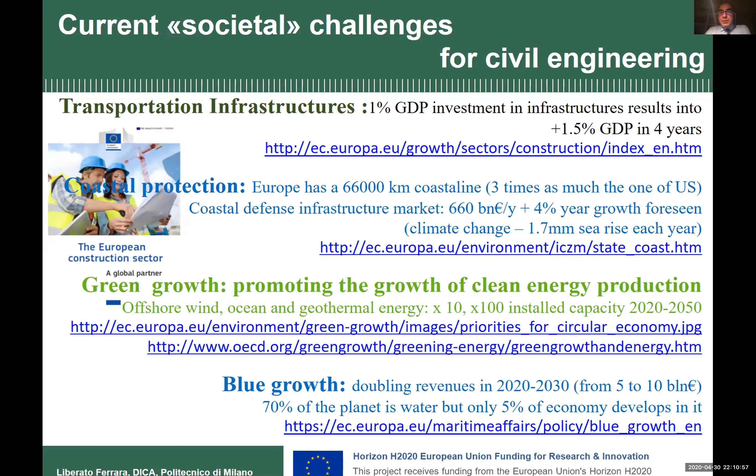So inside there is a terrific exhibit, I would say, where they try to force us to think how the world will be in the future. And the scenario is that nowadays, 55% of the world population lives in cities, lives in urban areas. And if you look at high-income countries, up to 80% of the people live in urban areas. And every year, about 1% of the current world population, more than 1%, because it's 75 million, they move from the countryside to the cities. And in 25 years from now, 2 over 3 people on planet Earth will live in the city.

But when I visited this museum about 2 years ago in summer 2018, I was hit by one of the panels in the exhibit, where it's written that humankind has become a geological force. So we have acquired such a power that we are able to shape the planet like a geological accident or geological event, an earthquake, a landslide, a hurricane, or whatever, is able to do.

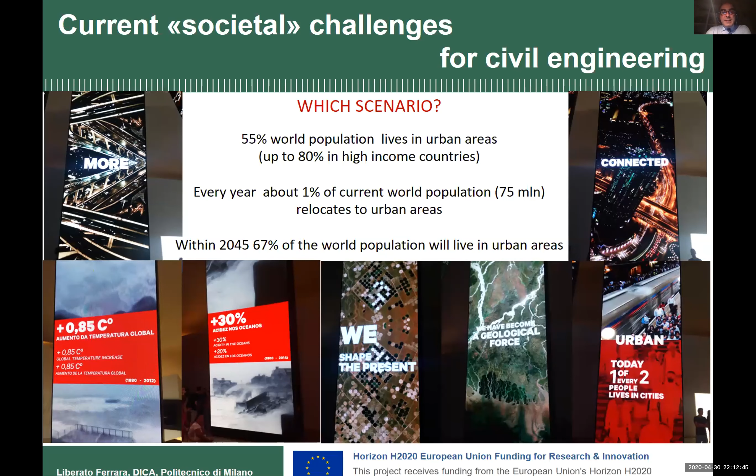And which are the consequences of this, for example, on structures, on concrete structures? Well, for example, because of climate change, we have increase of carbonation-induced corrosion, because in our atmosphere the CO2 content increases and there is global warming, which also promotes carbonation. We have, because of increased seawater salinity and acidification and increase of sea temperature, an increase of chloride-induced corrosion. And because of extreme events, we can also have an increased physical wearing of concrete structures.

On the right of the slide, you can see the results of a study performed some years ago by a research group of the University of British Columbia in Canada, which shows in a mega city like Mumbai, a building which has been built in 2000 had an expected service life at that time of about 65, 66 years. But due to climate change, a building built in 2030 will have at that time an expected service life of about 56 years. And if you see on the same buildings how the service life evolved with time, because the climate conditions change, you can see that also for a building built in 2000, after 15 years, because the study then took the data of 2014, the expected service life already reduced by about 10 years, so to about 57 years. And the same, even faster decrease will occur in the future.

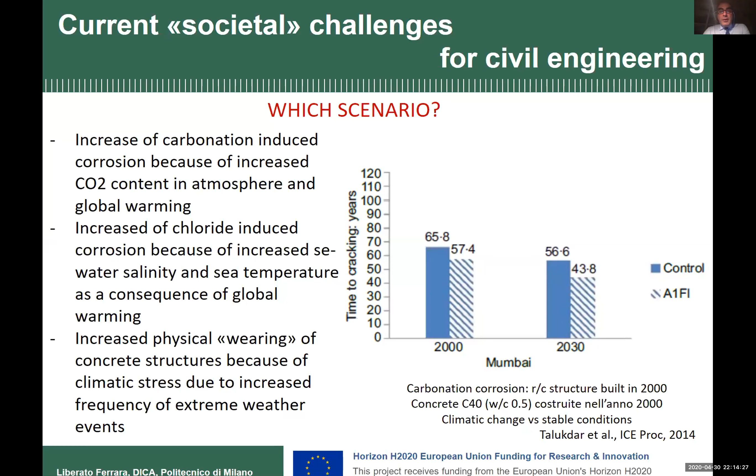Well, as a matter of fact, this is just one of the examples. And we know that for structures which experience these aggressive conditions, we have in the codes prescriptions on how to design structures which can guarantee a minimum expected service life. So for chloride-induced corrosion, I use here the notation and the symbols and the prescriptions of the Eurocode, which is the standard and the code I am used to. So chloride-induced corrosion, we call condition XS. So we have some prescriptions about the maximum water cement ratio, minimum cement content, and minimum compressive strength.

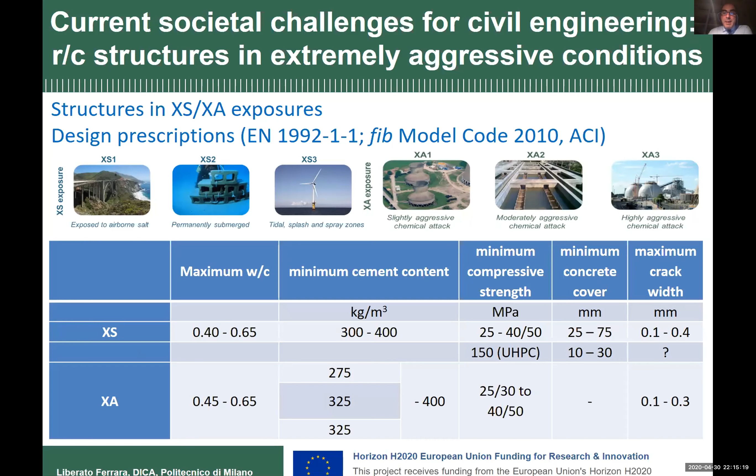And if structures experience chemical attack, we have different prescriptions according to the severity of the attack. But as a matter of fact, if you look at this table, hardly you can realize there is a performance here. These are prescriptions which are mainly there to achieve a minimum level of performance. But also structures built respecting these prescriptions have this situation. These are structures which are really not older than 10 to 15 years, so which were built, designed and built according to the prescriptions.

The left is a harbor dock in Morocco, and the right is a structure in a harbor in Spain, in a harbor in the Mediterranean coast of Spain. And you can see very damaged spots, which probably occurred, in the case of the harbor, for example, due to the repeated hitting by the ships, by the vessels. But also because one thing is what we design, another thing is what we construct on the site. There are several variables intervening between them. These are some other pictures which are strictly referred to our project ReSHEALience, because they are a structure on which we are trying to intervene in some way.

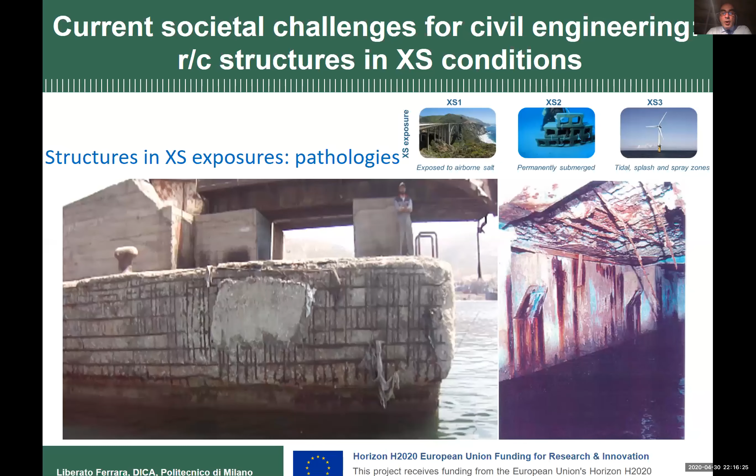This is a cooling tower in a geothermal power plant. The water, which has to be cooled down before being reinjected in the ground after the geothermal process, contains a lot of sulfuric acid and sulfates, so it really corrodes the concrete because of the reaction which happens. You can see the severe state of damage in which these structures are.

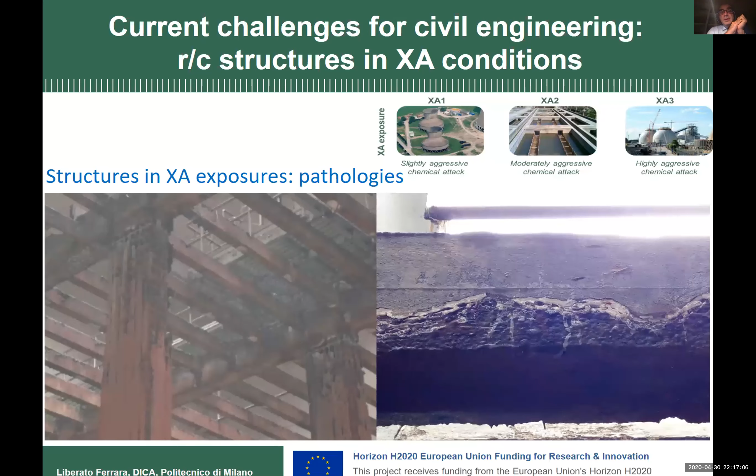On the right, you can see that the beam was repaired. The top part is evidently new, but the degradation, with the production of ettringite and other expansive products, continued also after the retrofitting of the structure. As a matter of fact, this poses the problem that we have to consider not only how durable a structure is when newly built, but also how durable a retrofitting will be, how long a retrofitted structure will last.

According to a survey made by this European project about 10 to 13 years ago, 50% of repaired concrete structures fail once again after the repair, and 1 in 4 fails within the first 5 years after the repair. So there is really an urgent need to profoundly rethink the concept and design processes for new and repaired structures in aggressive environments.

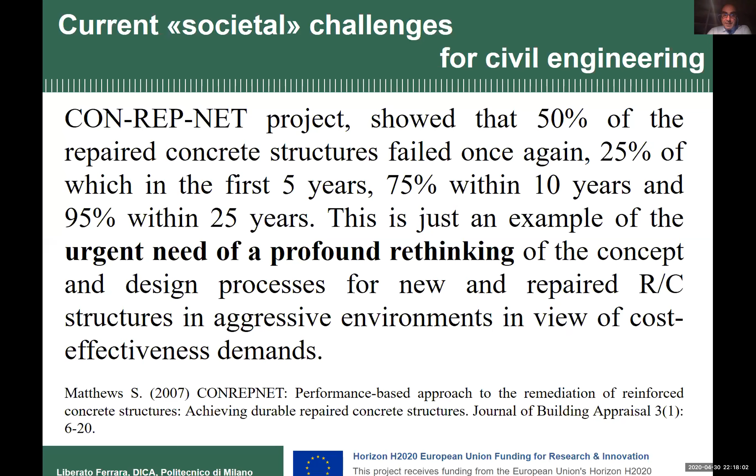Also in view of the challenging demands, what is the performance that we have to ask of our concrete? The first performance we ask of concrete is strength, the compressive strength. Nowadays we can really effectively make very high concrete strengths: 60, 80 megapascal are quite common, even 100 or more.

But the other question is: do we really need higher and higher strength? Can we really do better than what we are currently doing in terms of efficient use of the binder to get the strength? Or shall we look to some other performance from our materials and structures? So I tried to think a little bit out of the box.

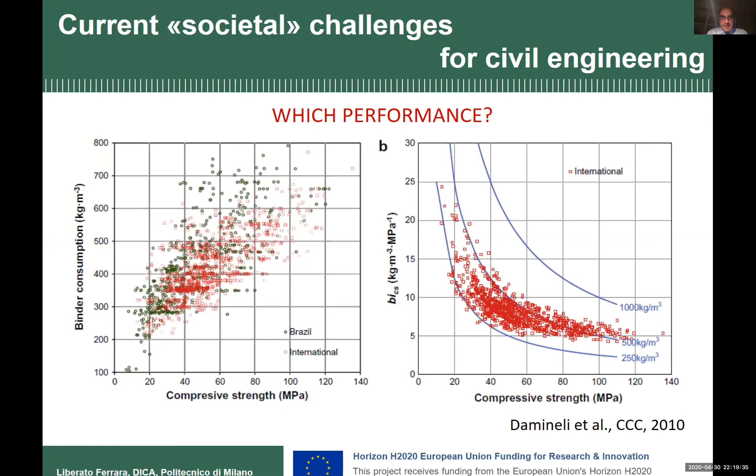I went back to a literature book I read as a high school student, by an Italian writer who died more than 30 years ago, whom I loved quite much. It's called American Lectures, because these were 6 lectures that Italo Calvino, the writer, was supposed to deliver at Harvard University in the fall of 1985. He died barely 15 days before leaving for the US, and he gave the book the subtitle: Six Memos for the Next Millennium.

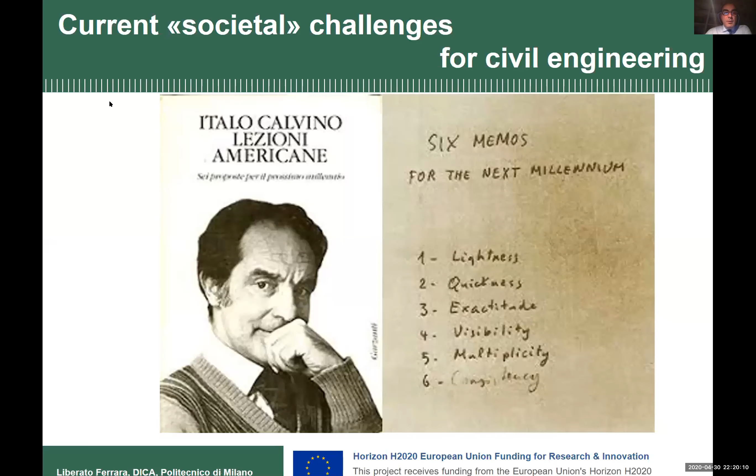Which are these six memos, or six keywords? He wrote: lightness, quickness, exactitude, visibility, multiplicity, and consistency.

So I tried to ask: how can we interpret these words from a structural engineering point of view? Lightness could mean let's guarantee the same structural performance using less material. Quickness means faster construction. Exactitude could mean let's optimize the structural use of material, let's try to think within a metamaterial framework.

So let's try not to think starting from a material and see what performance it has, designing accordingly, but let's try to reverse the process. Let's try to see which performance we need, the level of performance we need, and let's try to design a material which guarantees that performance and that level of performance.

Let's use structural shapes which really match the function. Let's try to think of something which does not replicate the same beam and column scheme. Let's think of material multiplicity, materials that are functionally graded, with non-conventional functionalities and properties. And let's try to think of all this within a consistency framework, a holistic approach which combines process and performance.

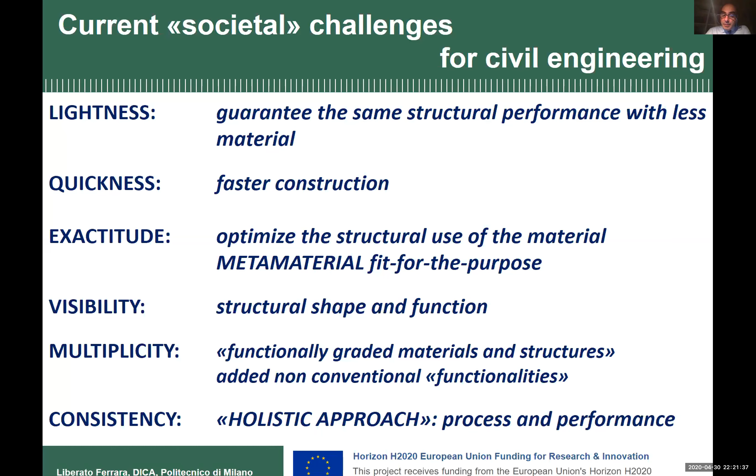This was the initial framework in which 14 European partners, which you can see here, grouped together to propose a project to the European Commission. We had previous interaction with 6 universities, research collaborations for a long time before, and industrial partners related to different of us.

Most of all, the important thing is that the industrial partners cover the whole value chain of the construction industry. We go from material production, to precast concrete, to engineering consultancy, to large end users, because Enel Green Power is the largest Italian and European producer of renewable energies, so it's a large end user. And we have precast concrete, engineering, construction firms, infrastructure and construction companies.

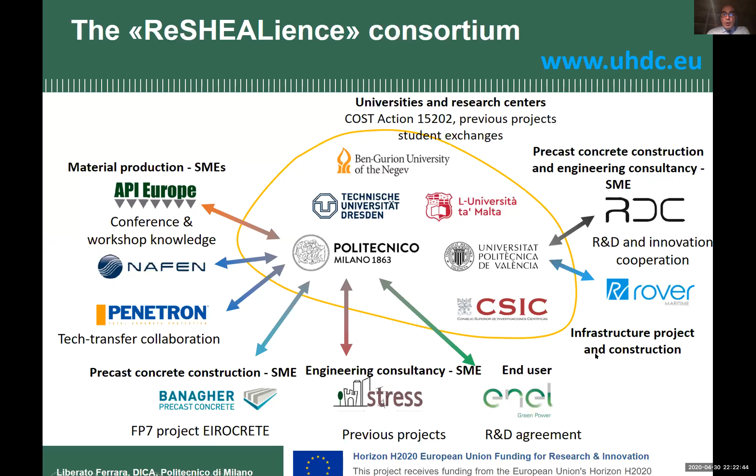This is the logo of our project, and the title focused on coastal defense and green energy service infrastructures through enhanced durability, high performance, fiber reinforced cement-based materials. The project is now in its second half, because we started at the beginning of 2018, and our goal is to develop an ultra-high durability concrete and the methodology for durability assessment based design for structures under extremely aggressive environments, because we want to improve the durability and predict the long-term performance.

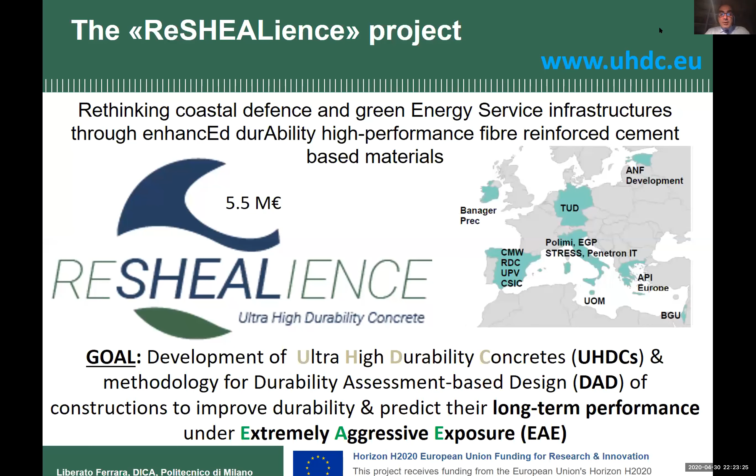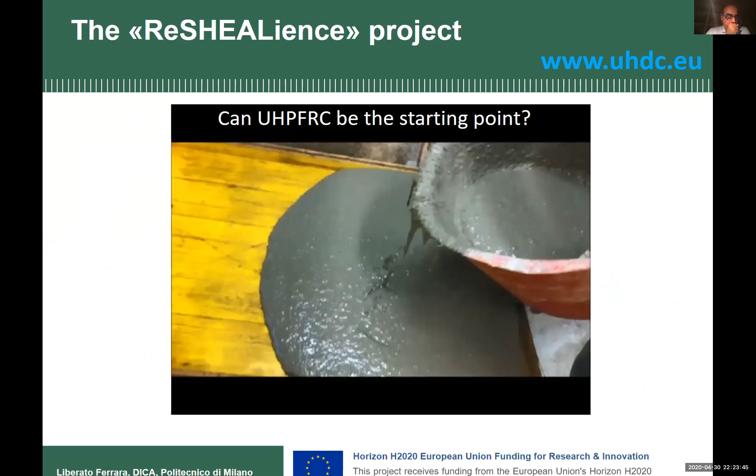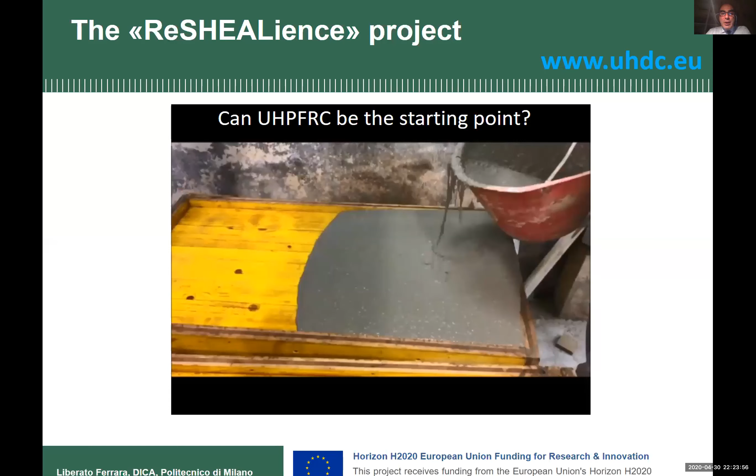So what was our starting point? Our starting point was ultra-high performance fiber reinforced concrete. This is a movie from our lab, made by master thesis students. I don't know if you can also hear the soundtrack that a colleague of mine put under this movie - it's music by Bruce Springsteen, titled Tougher Than the Rest, because we all know that these ultra high performance materials are extremely important for their enhanced toughness, fracture toughness.

Where do we want to use these materials? We have used it because these pilots are ready - some of them are already in place, some just need to be put into place because we had delays due to the COVID crisis - in 6 pilots. 2 of them are in Italy and are 2 basins in a geothermal power plant.

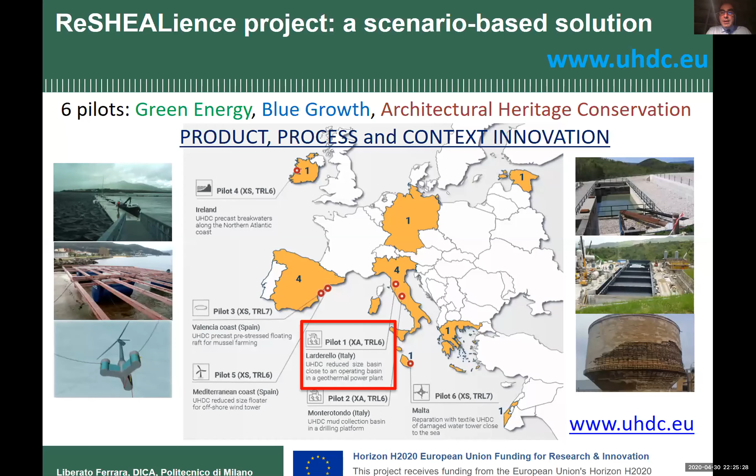So these are different structures in different exposure conditions, because we go from acid attack to chloride attack in different temperatures, since the Mediterranean is different from the North Sea with the wave motion. We also have airborne chloride salts, like in the case of the existing structures in Malta. We used these 6 pilots, designed because they relate to 3 specific cutting-edge sectors of our economy: green energy, blue growth, and architectural heritage conservation. And we started assigning the performance requirements.

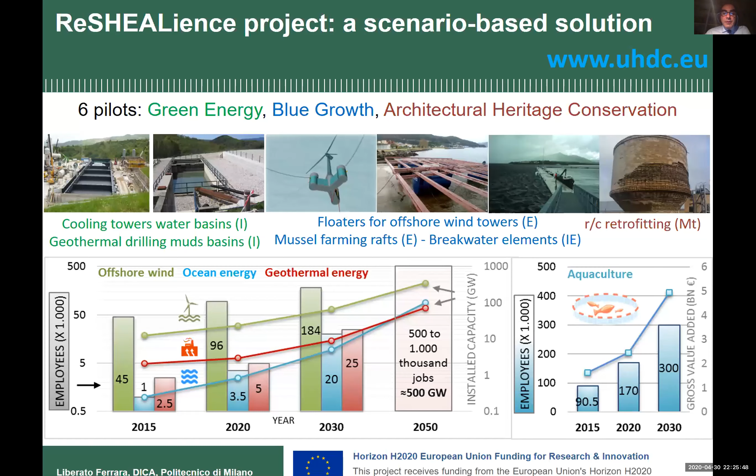For each of these structures, we have different requirements in terms of strength, in terms of workability, in terms of presence or not of fibers, whether we wanted to use conventional reinforcement, and the availability of constituent materials in terms of cement, supplementary cementitious materials, and so on. Also, to cast a new structure you need a consistency which may be different from the one needed to retrofit a structure.

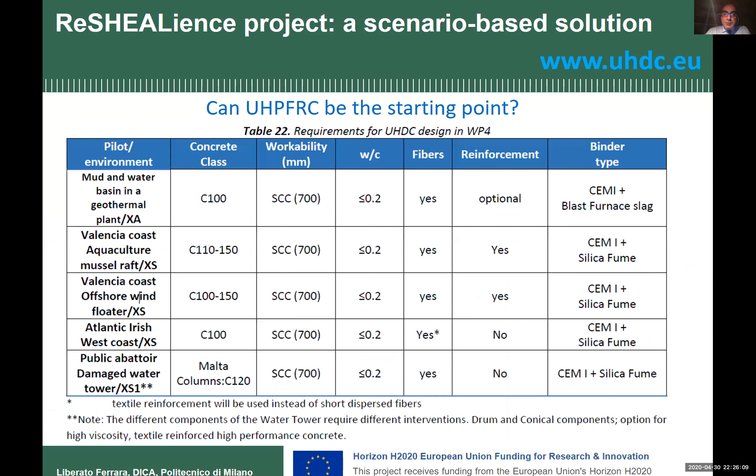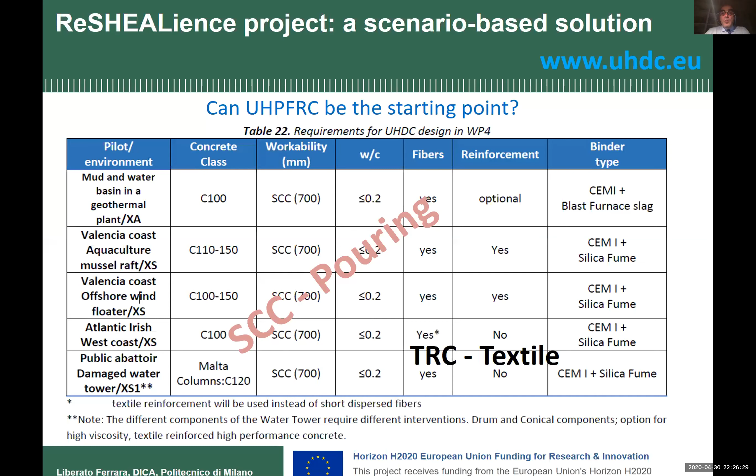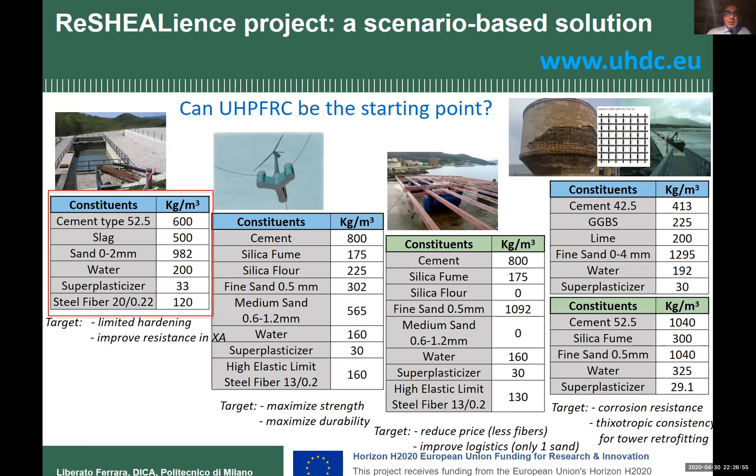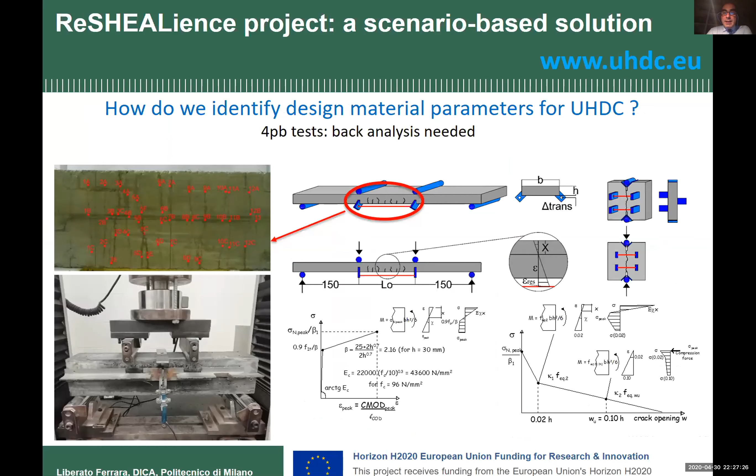Then from the results of flexural tests, through the laws of fracture mechanics, we were able to identify the constitutive relationship in tension, which was used in the design. We also developed a specific test methodology, which we call a double-edge wedge splitting test, to directly identify this law - because a bending test requires back analysis, whereas we needed something fast and effective. So we developed this test, basically a modified Brazilian splitting test. We introduced notches to localize cracking, which is also sensitive to the alignment of the fibers.

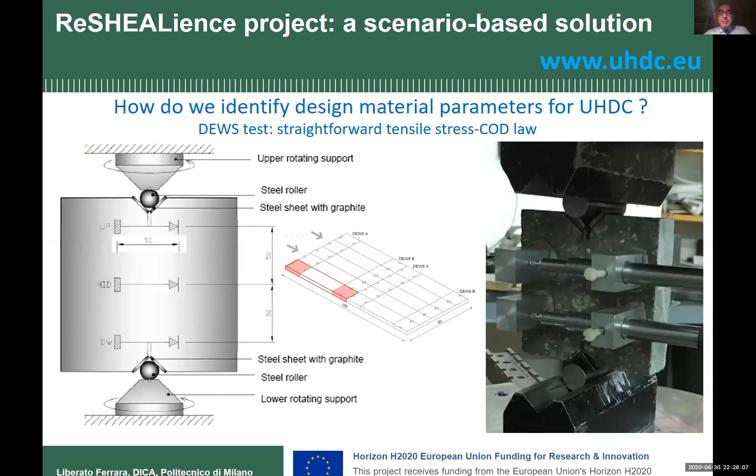And so we hypothesized, and we calibrated experimentally and numerically. We believed that this test gives us straightforward the tensile stress crack opening constitutive law of the material. Is this true? We simply picked up the results of this test and used them to back simulate the results of the bending test.

You can say, well, but why are you happy if you get, in one case, a lower bound, which may be on the safe side, and in the other case, an upper bound? Well, because one of the specific characteristics of these materials is that we want to use them to reduce the quantity of material we use. So we will design our structures to have thin elements, much thinner than what you have in conventional concrete. So in this case, the prediction is really apt.

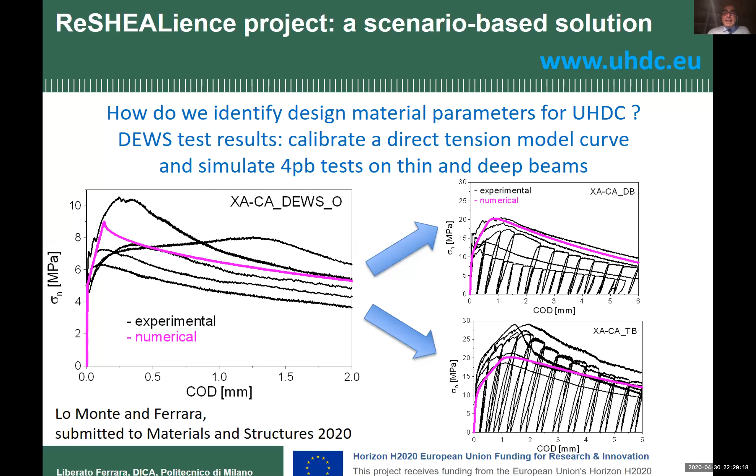So we started with the design of a basin to contain water. The current solution for this basin, which is in reinforced concrete, to contain water in a geothermal power plant, designs the walls 40 centimeters thick, just for the sake of durability.

Then we said, if we use our ultra high durability material, let's see how low can we go, how thin can we go. We were able to design, not specimens, but in this case, the structure, the walls of the basin, as thin as 6 centimeters.

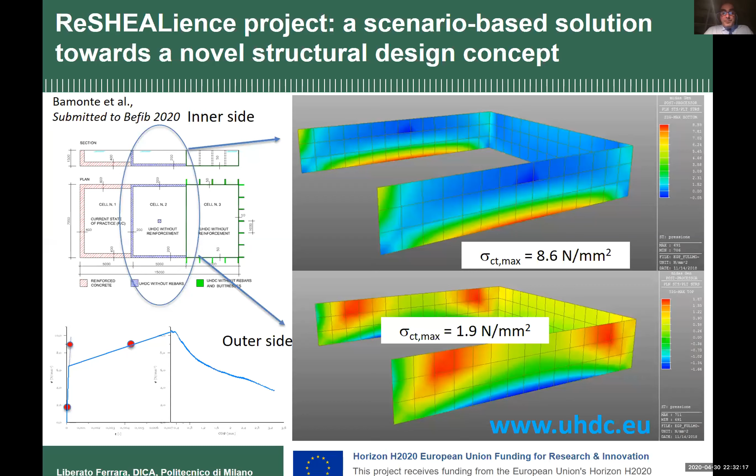According to the mix design that I showed in the previous slides, there are 120 kilos per cubic meter of steel fibers. So this is ultra durable concrete that we designed to use, a strain hardening fiber reinforced cementitious material with functionalizing micro and nano scale constituents, because in these materials we added crystalline admixtures for self-healing, we added alumina nanofibers, cellulose nanofibers, and nanocrystals. For sure, we can obtain a higher performance.

For example, if you compare with conventional concrete, our material will be curve B, and the conventional solution will be curve A, so we are higher. Which means that we also pay a higher cost. We will see later probably how much higher.

A higher cost at the time of construction may not necessarily mean a higher life cycle cost, because higher cost and higher performance now may also mean that you have longer durability, so you will need an intervention later in time, adding additional extra cost later than what you would need for a conventional concrete solution.

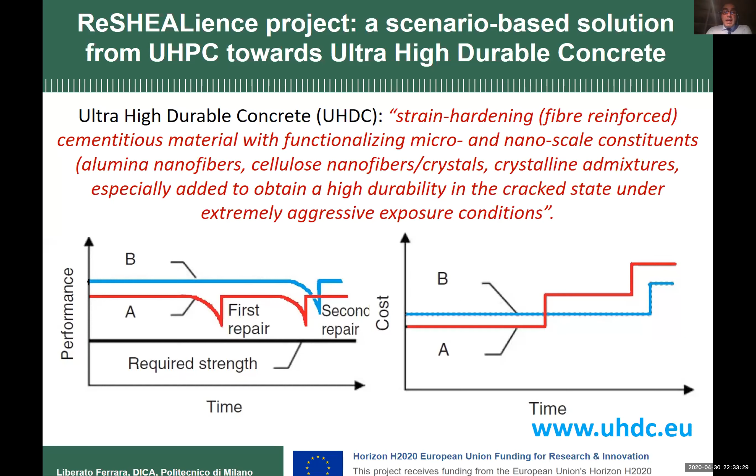So we tried to incorporate into these materials some self-healing admixtures. This stimulates the growth of hydration products and seals the cracks.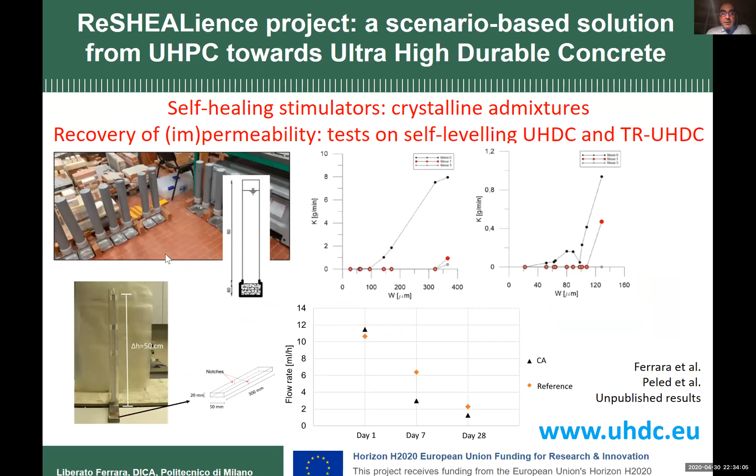These are some results not yet published, which were obtained by my colleague, Professor Alva Peled at Ben Gurion University. The crack closes after just a few months, and you can see the crystalline growth inside the crack, which reconstitutes the true continuity of the material.

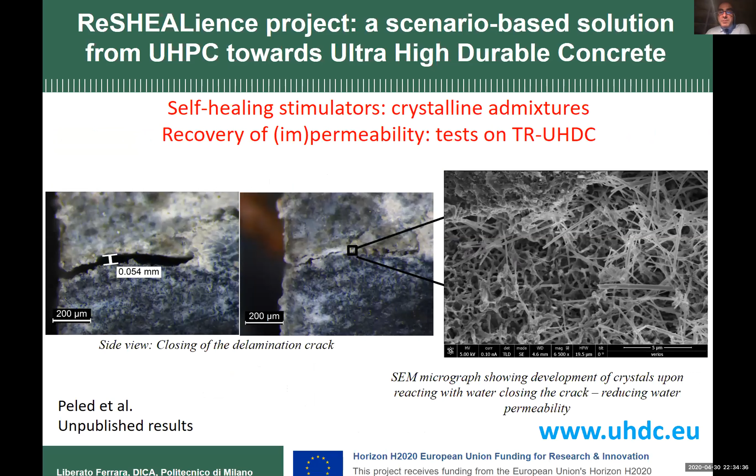We also observed, you can see other images of the cracks closing, how under repeated cracking and healing cycles—shown in this graph with the purple, green, and red curves—every time we pre-cracked the specimen, we healed it for 1 month. When we restarted, the material was able to guarantee repeatedly the same level of performance.

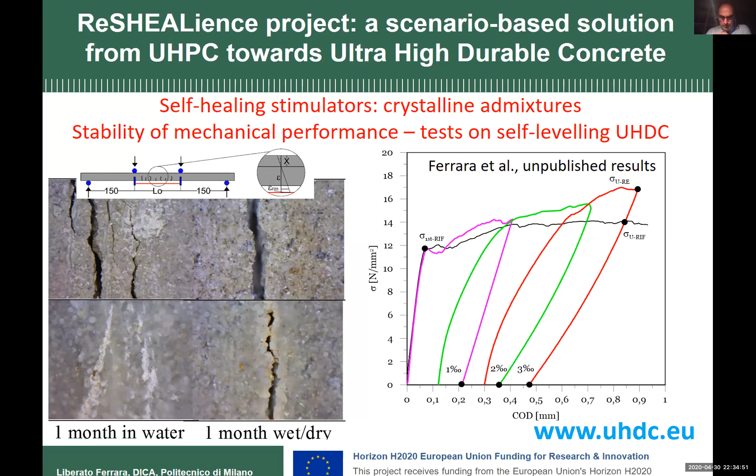We also observed that it's not only closing the cracks, but also at the level of the fiber matrix interface, there is a deposition of products along the interface, which really improves the fiber matrix bond and enhances the toughness and performance of the material.

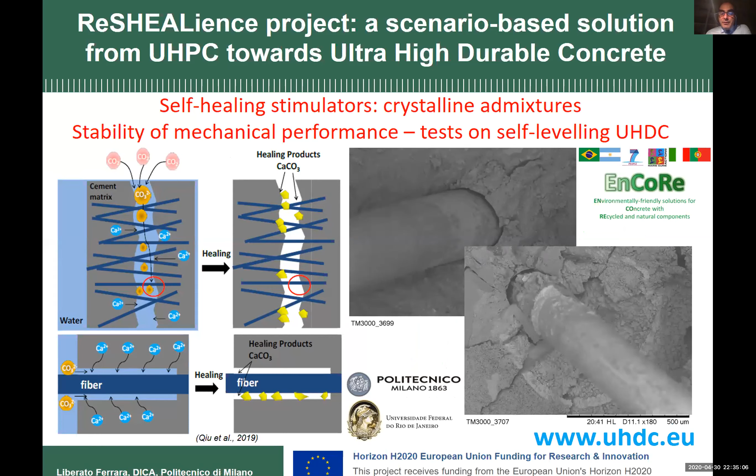So we wanted to go further, and we also went into the domain of nanotechnology. This graph, well known to people working in this field, shows the ratio between the specific surface area—which is also the reactivity of the particle—versus the particle size.

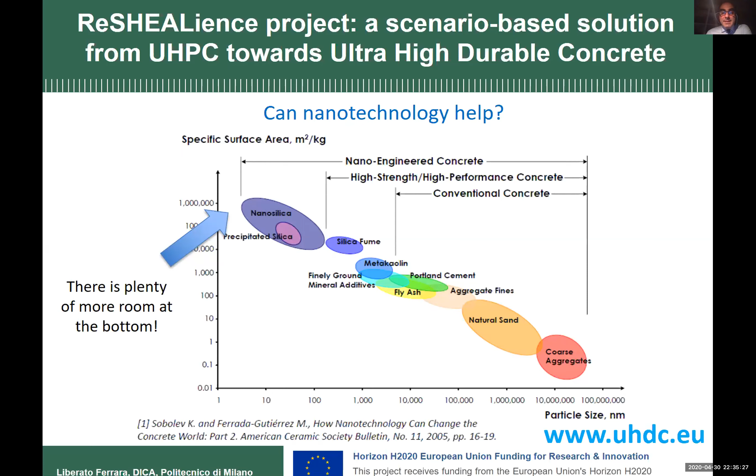We used alumina nanofibers. You can see here a nanograph showing them and the data of their dimensions, and also nanocellulose fibrils and crystals. These are products from some of our partners in the ReSHEALience project.

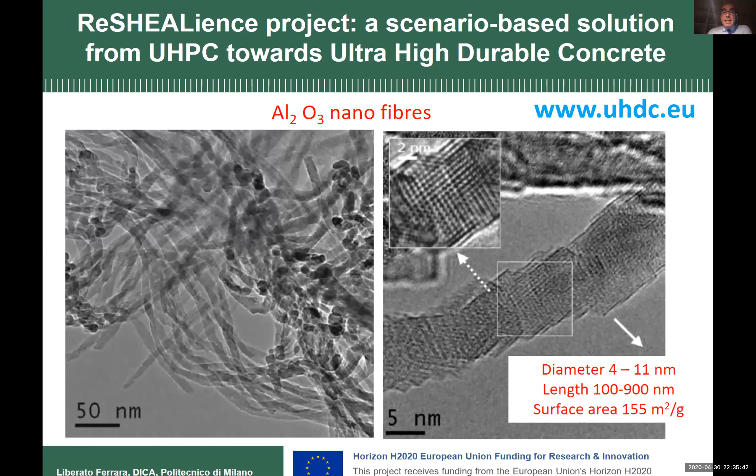So we used them at very specific and low dosages: 0.25% by weight of cement for the alumina nanofibers, for example, and 0.15% by weight of cement for the cellulose products. Well, what does this mean?

0.25% by weight of cement times 600 kilos of cement per cubic meter means that we need 1.5 kilos per cubic meter of alumina nanofibers. That seems a very low quantity.

But as a matter of fact, the problem is the dispersion of these nanofibers. On the market—which was not really for the construction sector, but for other industrial applications—these nanofibers came in a suspension at 2% solid concentration. So in order to have 1.5 kilos of nanofibers, you need 75 liters of suspension.

But in our material, if you look at the line for water in the mix design table, we had only 200 liters of water. If 75 of that has to go with the nanofibers, you will never be able to mix this material because your mix will be very, very stiff.

So with the companies, we developed a process to produce a 10% solid concentration. The challenge is not only making a denser suspension, but dispersing the fibers adequately within that suspension. We were able to successfully produce this more concentrated suspension.

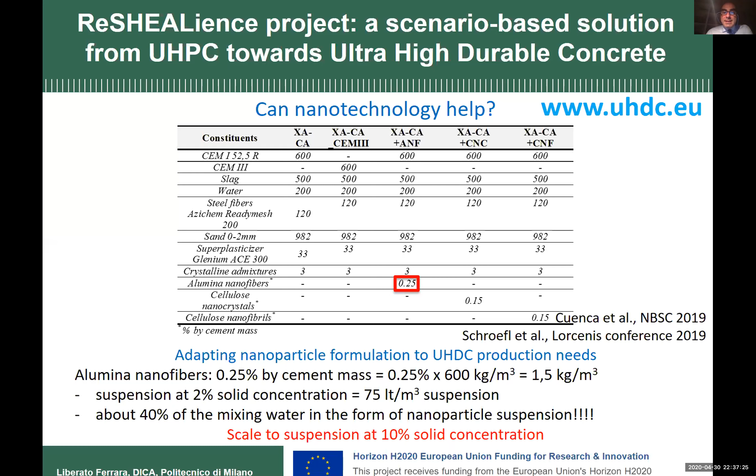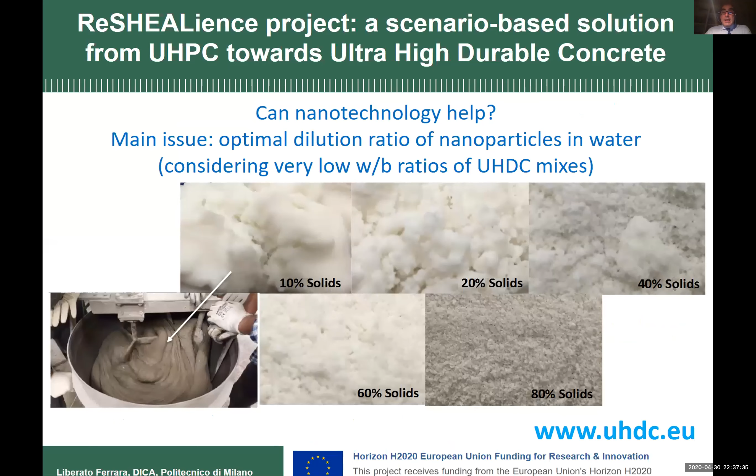So we said, okay, let's try to see how this nano addition works. We tested the compressive strength in the beginning, curing the specimens in a climate room or under the geothermal water, which we kept from the plant where we were going to build the pilot.

But the reason is that compressive strength may not be the performance we should look for. When we look into the flexural strength, we really saw an improvement, especially in the long term, and especially in the case of curing under geothermal water.

When we characterize our material, we cure it in ideal conditions. But if we have to build a structure which has to serve as a basin for geothermal water, we cannot wait 28, 56, or whatever days curing in ideal conditions. The basin shall be used immediately, so it will cure under the aggressive water.

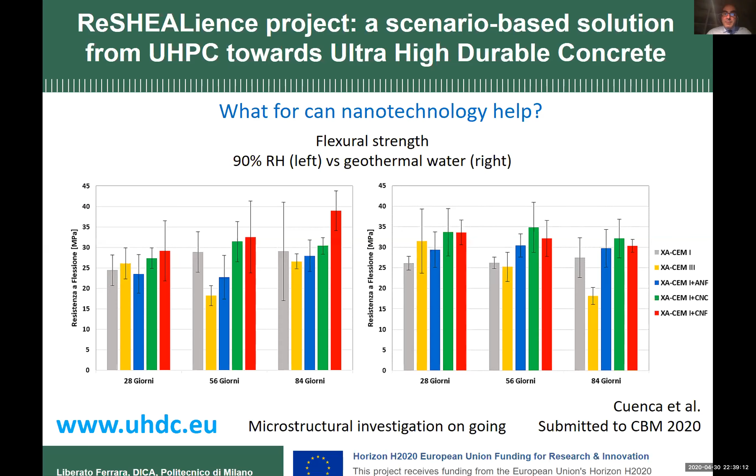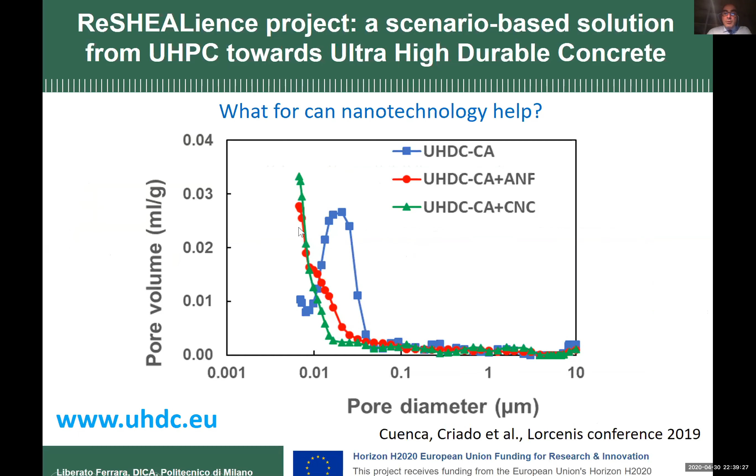This also resulted in a reduction of the shrinkage, and this reduction lasted - we tested up to more than six months, and it's maintained constant over time. And we see here some micro and nano pictures.

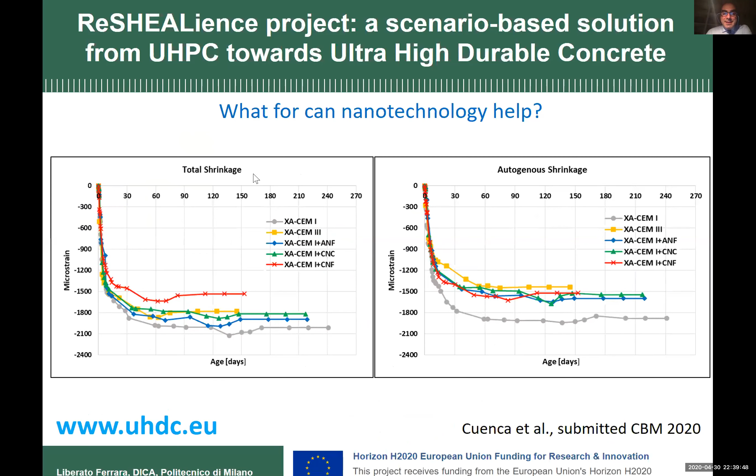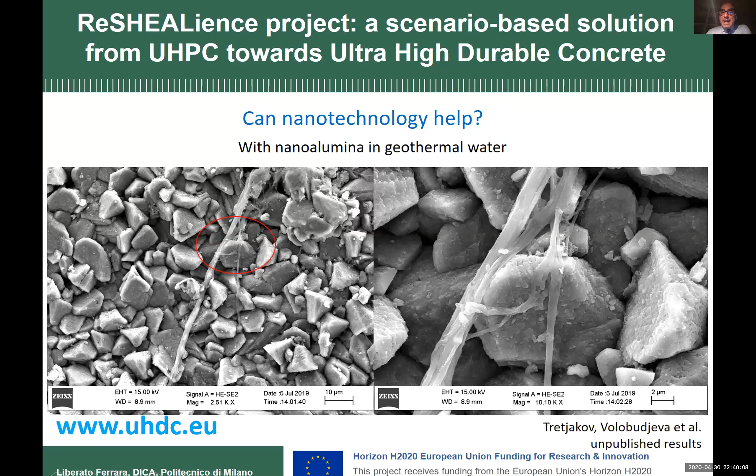There is really a reinforcement at the structure of the crystalline matrix. These are the alumina nanofibers, and in the right figure you can see some of the other products - these are the nanocellulose. See how they also serve as nuclei for hydration. The foam-like appearance are the hydration products of the cement around the cellulose particles.

Also, because the alumina nanofibers have some hydroxyl groups on their surface, they are hydrophilic as well, and the cellulose absorbs water and releases it on demand.

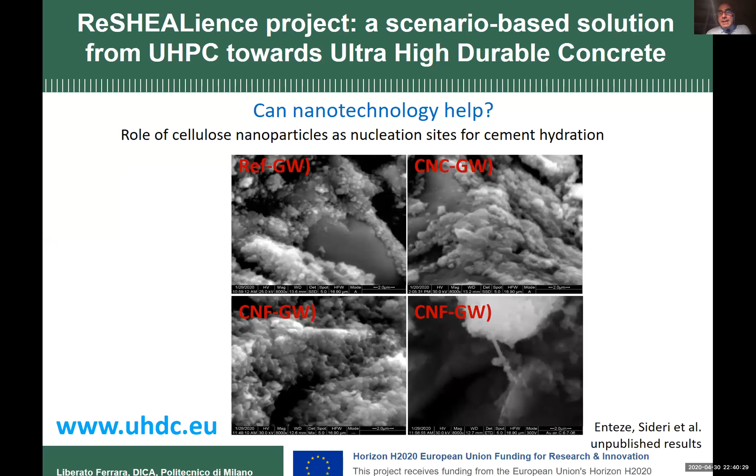I'm happy to say these are the results of a master thesis which was discussed yesterday, and the student was very well rewarded for his work.

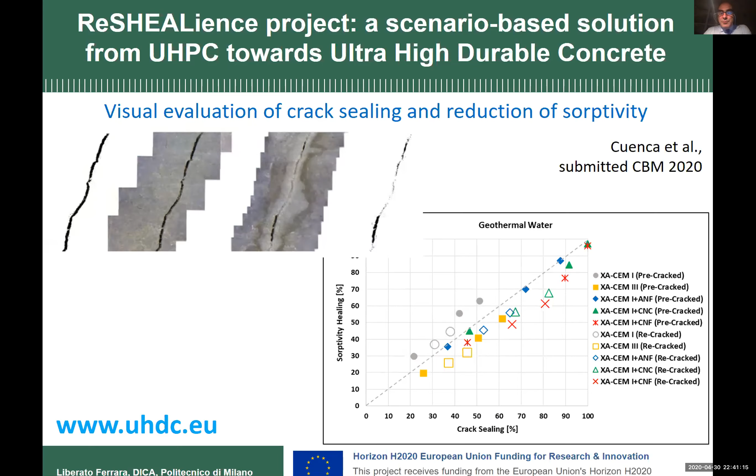So in the end, we asked how we could better exploit these results in designing a new solution for the basin. We thought of designing it in a precast way using precast slabs, cast horizontally, then lifted vertically and fixed. You can see in the scheme there are some buttresses, some columns which stiffen the wall.

We were able to reduce the thickness of these walls to 3 centimeters. Where you see the missing part in the top figure and the 3 squares here - actually in the pilot that we constructed, those 3 slabs are 2 centimeters thick.

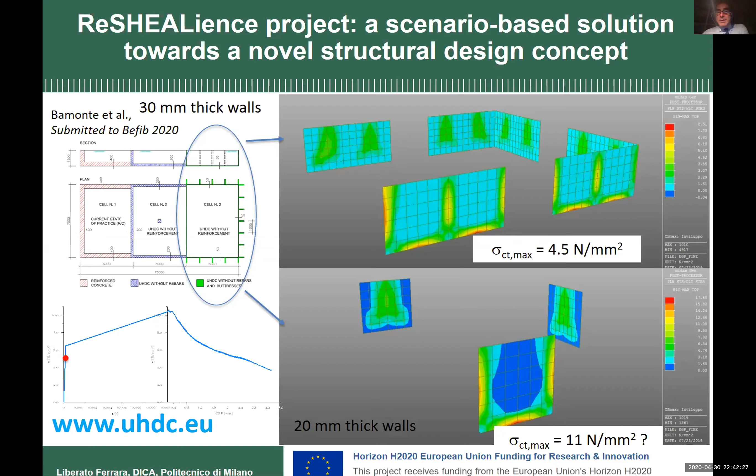Obviously the stress increases because you go to 4.5 and even to 11, and 11 is outside of the material capacity. But first of all, it's very localized at the border, at the boundaries of the slab. But also, this is an elastic analysis, and we know that this material really works in the post-elastic regime. This calculation, to which Salam Al-Obaidi also participated with Professor Bamonte, we have submitted as a paper to a conference in September.

We used the yield line mechanism approach to predict the performance, and we realized that even with 2 or 3 centimeters thickness, our slab was safe, and we were able to withstand also a surcharge weight much higher than the height of the wall.

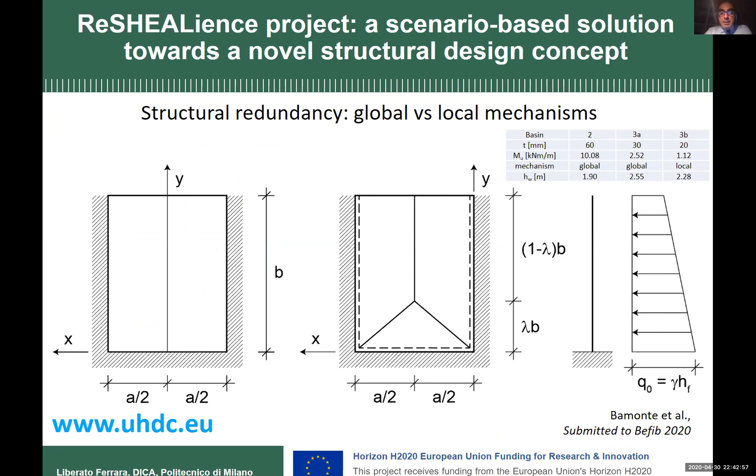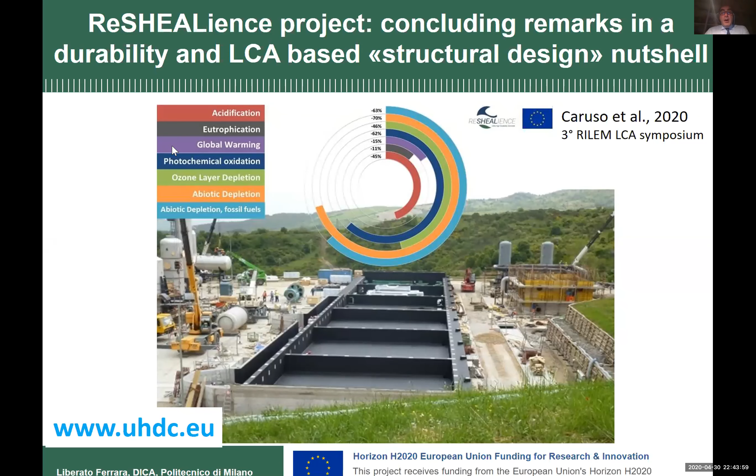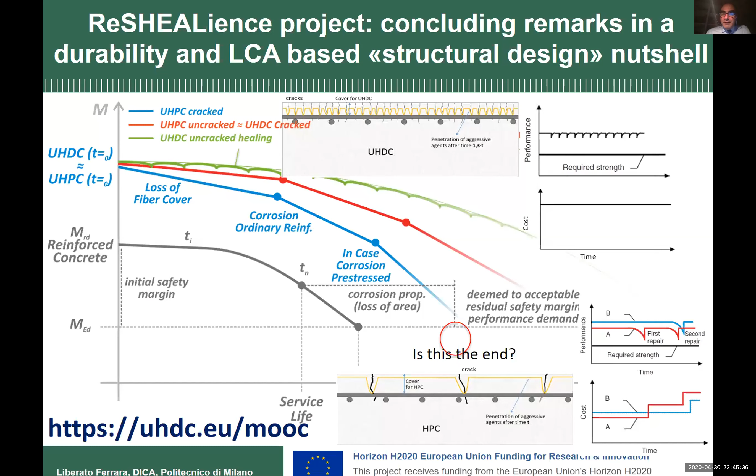But what does end of service life truly mean? Is this really the end of life of the structure, or should we start thinking in a cradle-to-cradle approach? We also addressed the issue of recycling these materials. It's interesting because they have a lot of cement and low water, containing a lot of unhydrated cement, so if you crush and recycle it, the cement will be able to react once more.

This is interesting work we are performing together with University of Malta and University of Valencia in Spain.

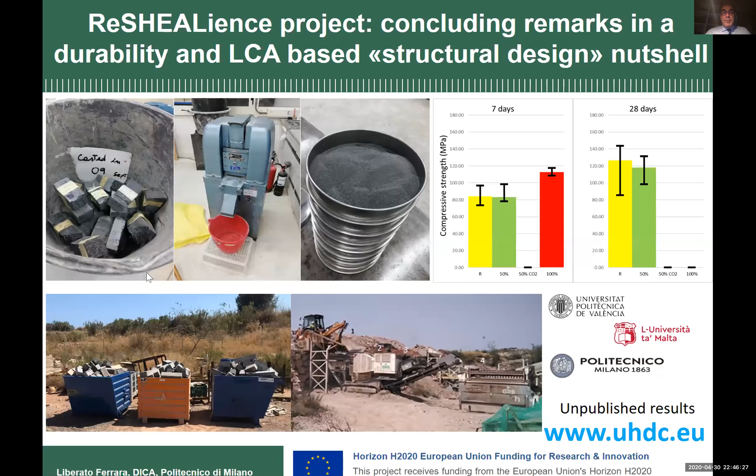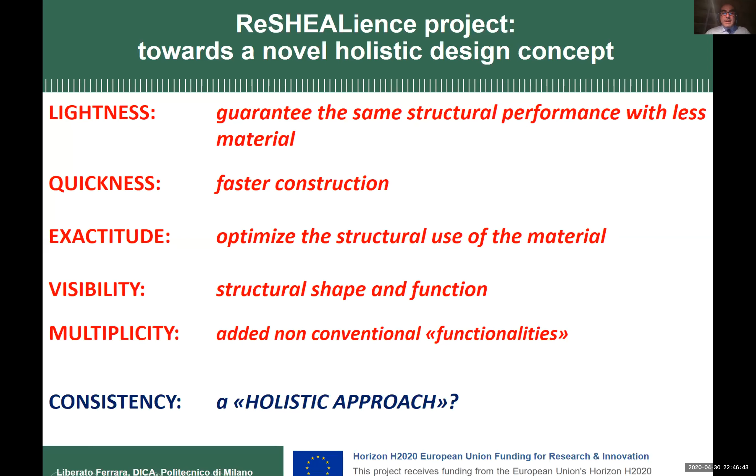Summing up, we addressed 5 of the 6 keywords of Calvino: lightness, quickness, exactitude, visibility, and multiplicity. What about the last one? Well, the first thing that everybody asks for is the cost. How much does this material cost?

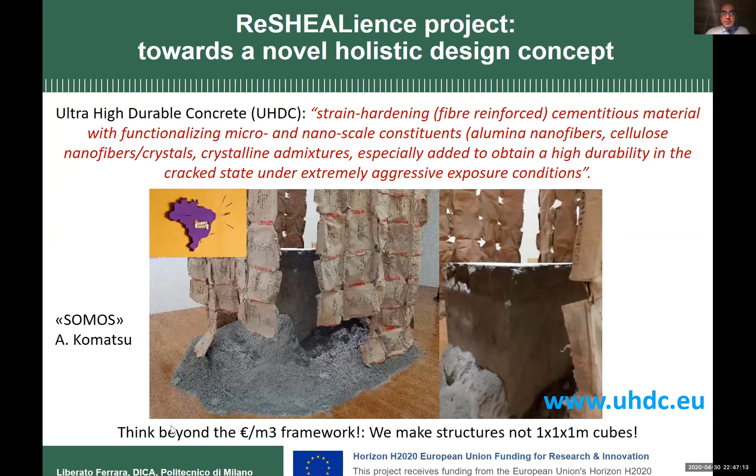We are used to thinking of cost per cubic meter, but we have to think beyond this. With our materials, we do not make 1-meter-side cubes, we make structures. So we should ask: what does a cubic meter of material give me back in terms of structural applications? This is a picture of casting this material on the construction site of a plant.

This was a site visit we made a few weeks before the lockdown in Italy. I did this visit with my colleague Professor Bamonte, and Salam did a visit with Dr. Lomonte, another colleague working on this project. We went there to supervise works during construction.

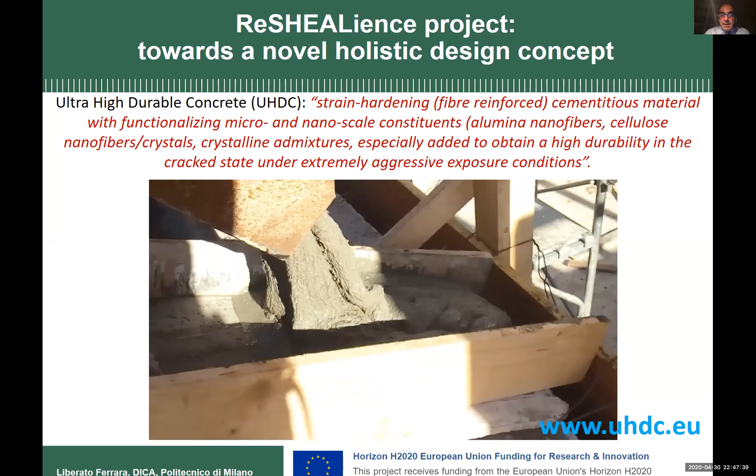As soon as we are able to go back to the site, we are going to start validating the project, filling it with water and monitoring the performance.

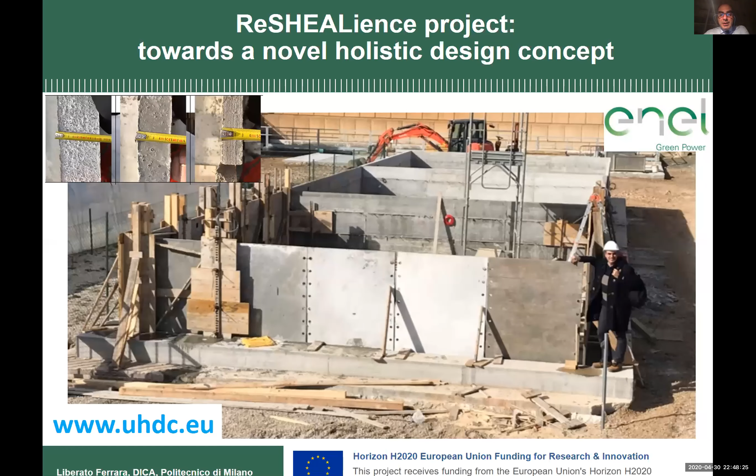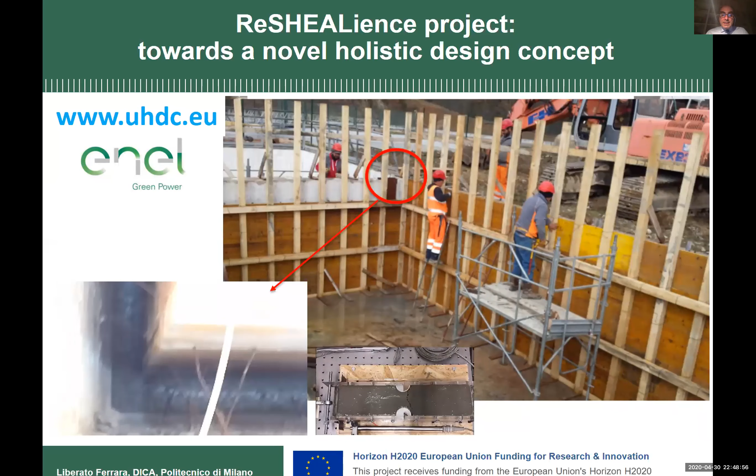Since this material is highly fluid, one of the problems was designing the formworks for static pressure and understanding how fast the strength developed. This is a tensile test made after half an hour with a specific setup we developed, and we correlated the results to the rheology of the material and to the yield stress buildup.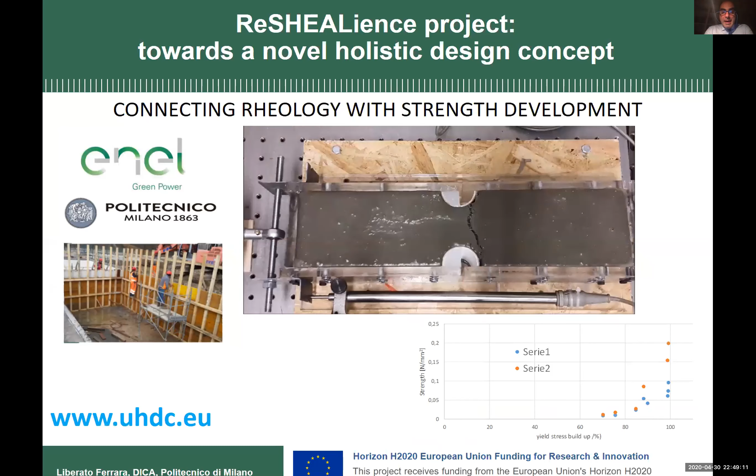This is the structure that you can see in the picture here, and you can see the mussels and the seafood which is farmed there. This is another pilot made by another Spanish partner, Rover Maritime Group, in collaboration with Polytechnic University of Valencia.

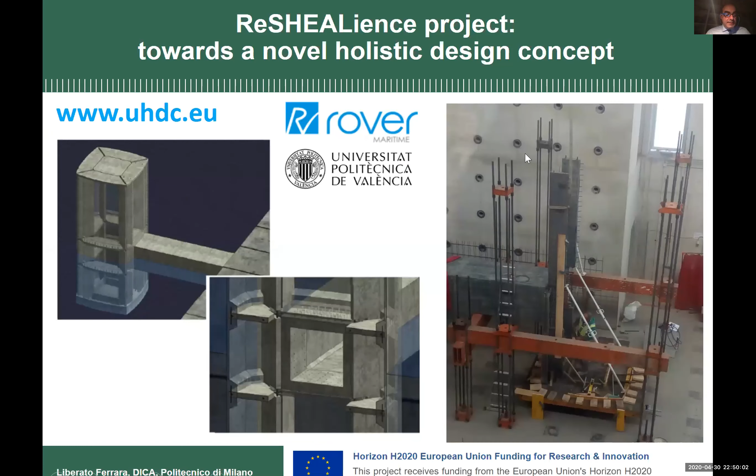It's a floater of a wind tower. These are some renderings, but the pilot, when I visited them, was going to be installed in the lab. This is the floating pontoon in Ireland, some pictures of the casting. The pilot is ready and is ready to be floated also.

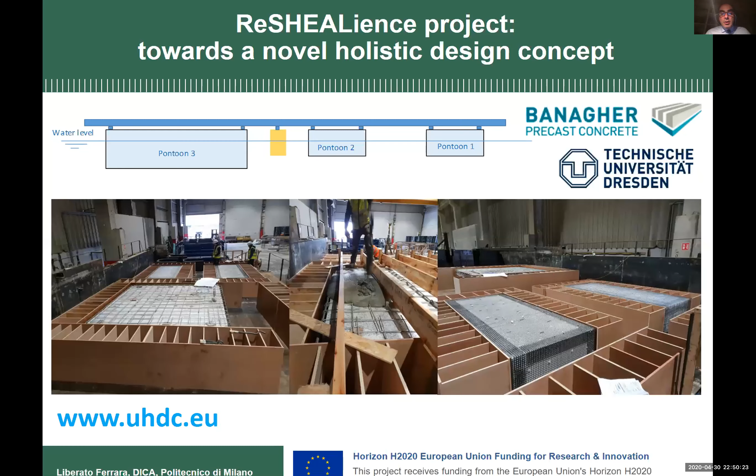And thank you for attending this talk. Shukran jazilan. Shukran, Professor. Thank you. Thank you for your informative presentation.